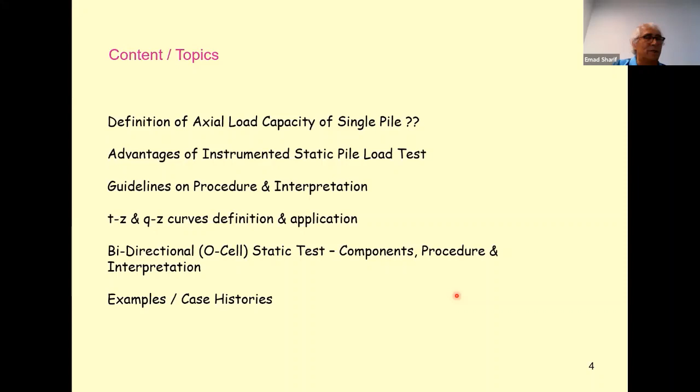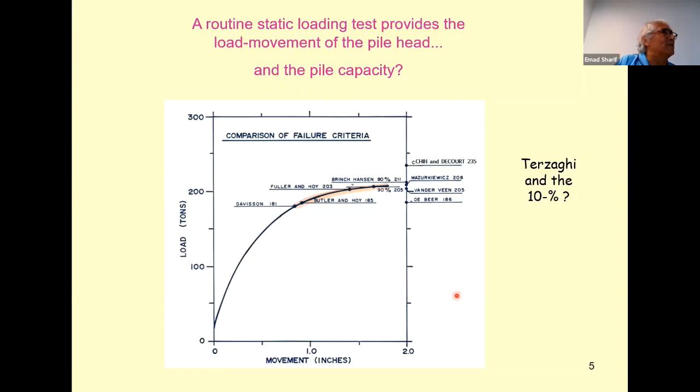As you can see on the screen, there are several methods known in literature, ranging from Davisson's rule to Fuller, Chin-Kondner, Brinch Hansen, DeBeer, etc. Each of these methods has its own analytical procedure, but gives a different definition of the axial capacity using the same data, and this is a problem usually in our literature. Still, the definition used in many specifications is the well-known criteria belonging to Terzaghi, which is about the 10% diameter movement of the pile, which can also be defined on such a curve. So the point is that the definition of capacity of a single pile is not well defined in geotechnical literature.

The decisive value of assessing the suitability of a pile to safely support a structure is the movement that the supported structure can accept without distress, not a capacity chosen as a specific load derived from the shape of or a point on the load movement curve. Yet, the latter is the most common approach to assessing the suitability of a pile for use in supporting a structure.

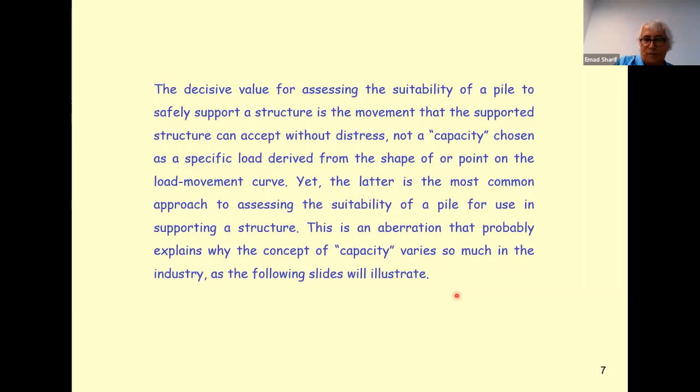And this is the problem that we have. We always have to define a capacity of the pile, but still the capacity definition is not well defined. According to Dr. Fellenius, it is the displacement or settlement of the pile that the structure can tolerate without distress that we should be looking after. However, it is still important to define a capacity of a pile from its loading test behavior.

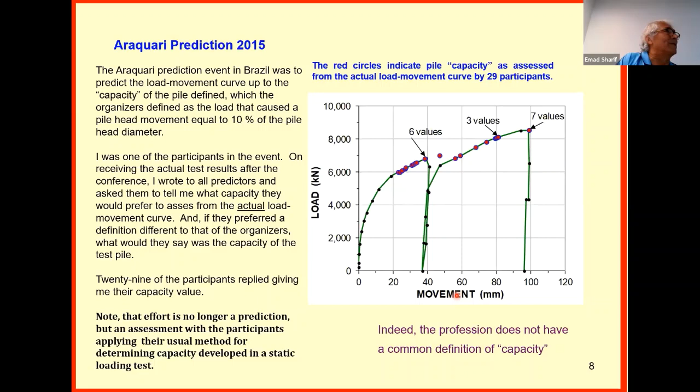Another example is the prediction event in Bolivia, held in May 2017, where assessors from different places over the world, 94 individuals, participated. A pile load test curve was distributed, and the results again show very big variation in the assessment of the capacity of the pile, with a very large statistical deviation. So once we want to define the capacity of a single pile from load test data, we must be careful to give a clear definition of how we are going to do that.

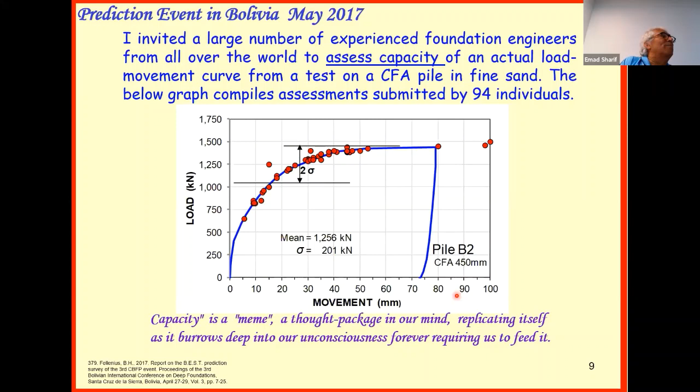And this is why the importance of instrumented load tests comes into the picture. According to Dr. Fellenius, the capacity is a meme, a thought package in our mind, replicating itself as it burrows deep into our unconsciousness, forever requiring us to feed it.

So here, determining the force by means of a strain gauge. The use of instrumentation or strain gauges in the static pile test gives the opportunity to determine the forces distributed in the pile shaft and improves our understanding of pile behavior. Nowadays, vibrating wire type strain gauges are used, and sometimes electrical resistance gauges are still used. This is very well established, and many companies produce accurate vibrating wire gauges which are commercially feasible for accurate and reliable determination of the force imposed in a test pile.

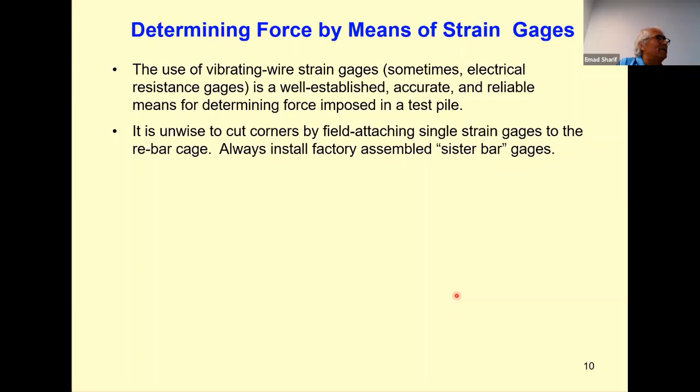However, it is unwise to cut corners by field attaching single strain gauges to the rebar cage. Always install factory assembled sister bar gauges. In the next slide we'll show photographs of what we mean by sister bar gauges and factory assembled systems of strain gauges.

Lately, fiber optical cables known as DFOS have been used to obtain an almost continuous profile of induced strain. As of now, however, the cables are temperature sensitive and the readout unit is expensive. They should always be installed in pairs, two cables, and the data needs to be correlated to measurements from conventional vibrating wire gauges. So the use of optical cables has not been put into commercial practice yet, maybe in some research works, because it can give a continuous record of strains, not only at discrete levels as we usually do. Other instruments besides vibrating wire gauges are retrievable extensometers, used in some projects, but the most common type of strain gauge now is the vibrating wire type.

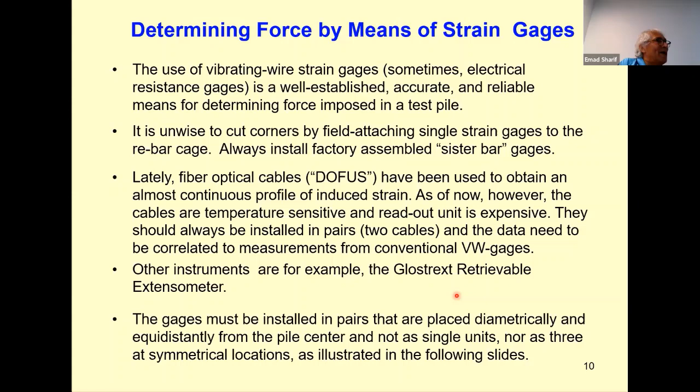The gauges must be installed in pairs, placed diametrically and equidistantly from the pile center, not as single units nor as three at symmetrical locations, as will be illustrated in the next slide. This is a very important guideline about how we plan our instrumentation. First, this photograph shows what we mean by the sister bar, a company or supplier assembled sister bar.

Here we have the strain gauge assembled to a separate extra bar that can be fixed along the rebar on the steel cage and tied to it. It has sufficient length so that it can develop the load, and sometimes it can be welded. It comes with different ranges of diameters suitable for different applications.

In local practices, sometimes we only use the embedded type strain gauge, vibrating wire strain gauge, and we just tie it to the steel bar like this. This method is subject to tilting, displacement, and sometimes damage.

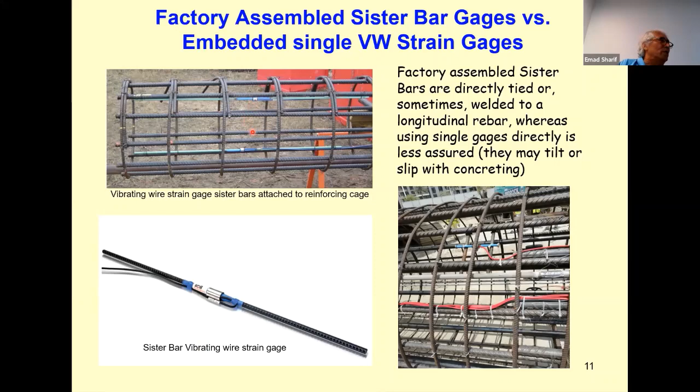So the state-of-the-art instrumentation is to use factory supplied sister bars, because we are looking for accurate simulation of the pile behavior, and there is no means of reducing the expense of the test itself.

Now, in many cases, once the load is applied during the static pile test, there will be a kind of bending effect at different levels. Bending may result from deviation from verticality, change of cross section, and other reasons, and therefore the strain gauges installed at specific levels along the pile shaft must be placed in pairs.

Pairs means that we have strain gauges, for example at level 1, installed as 4 strain gauges along the cross section: A, B, C, and D, where A and C are on one diameter, and B and D are on the other diameter. So we have pairs of strain gauges.

However, in other cases where bending effects exist, we will see that A and C, which are a pair of strain gauges located on the same diameter, each show a different range of strains. Also B and D show a different range.

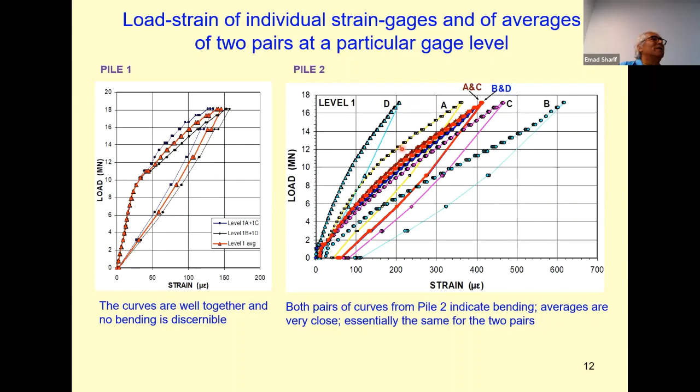In this case, both pairs of curves from pile 2 indicate bending. Averages are very close, essentially the same for the two pairs. However, both sets of records for pile 1 and pile 2 are good and fully useful.

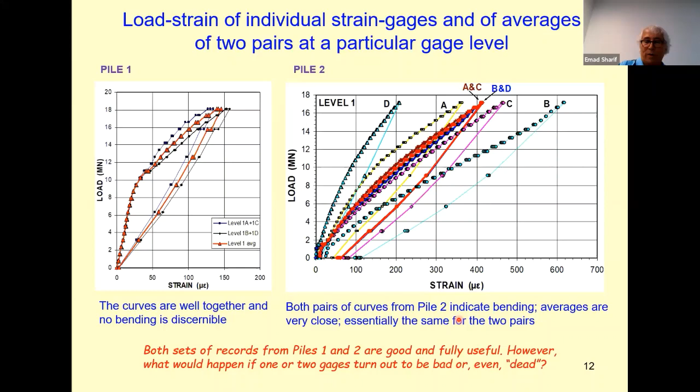However, what would happen if one or two gauges turn out to be bad or even dead? This is explained here. If we want to combine three of the gauges, so I have A plus C plus D, or A plus C plus B, or two strain gauges that are not pairs.

So instead of A and C, I take A and D, which are on different diameters, or B and C. All these selections will be poor. All these selections will give me data that does not represent the actual behavior because of the effect of bending.

So in this case, if any of the strain gauges gave bad data or was dead, we have to cancel the other pair. So I can combine A and C, and give the average of A and C, or B and D, or the four together, but I cannot combine any three of them because it will shift the measurements to a wrong position, as we see from the curve. There will be a big error based on the amount of bending.

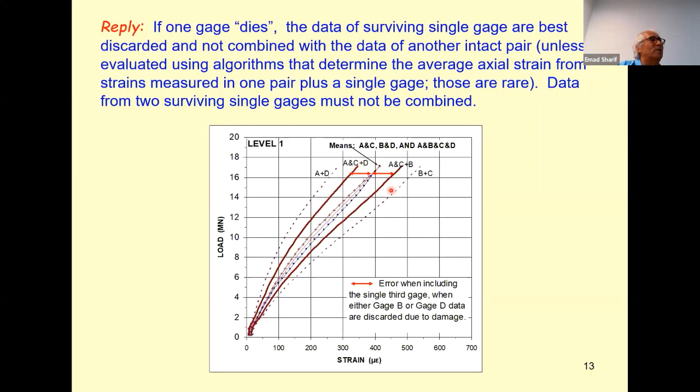But as a guideline, in our testing we must ask the reporting company, or the company doing the test, to present such data about the strain and load information, so we can see the response of each strain gauge and how the averages have been taken, because the averages are then used to calculate the load at every level, as we can see now.

So now we measure the strain. With the guidelines given, we know that we are getting reliable measurements of the strain at different levels, but we are not interested in the strain. We are interested to know the stress, or to measure the load.

So how do we get from strain to force? We need to know the force. If we look at the relationship between strain and stress, we multiply the strain by the modulus to get the stress, and multiply by the cross-sectional area to get the force. Therefore, the term EA, which is the axial stiffness of the pile, is a key parameter.

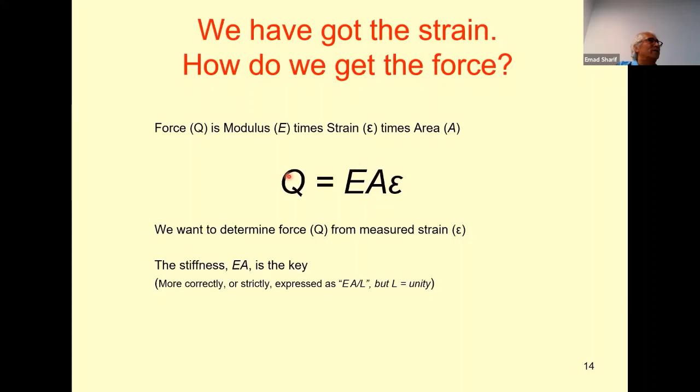Here we must focus on how we can get an accurate estimate or assessment of EA in order to get the force at different levels. So here's the situation: if we are dealing with concrete piles, then we are talking about combined material. We have concrete, we have steel, and sometimes we have casing.

If we are talking about steel piles only, then the modulus is ES, and it is almost linear. It is less dependent on the strain, and the cross-sectional area is well defined, so there is no great deviation. But when we are talking about bored piles, about concrete piles, then we are talking about steel and concrete, and generally equations like this can give us the combined modulus of the cross section.

However, we know that ES, the steel modulus, is very accurately defined, and the area of steel is also very accurately defined, whereas the area of concrete and the modulus of concrete are less accurately given. So ECAC, this term, is less accurate, and in this case we have to see what we can do about it.

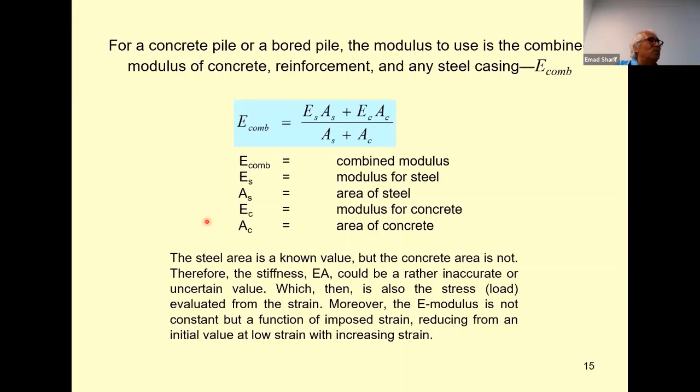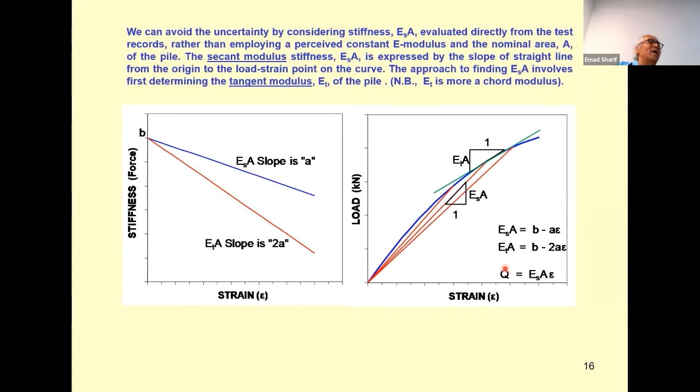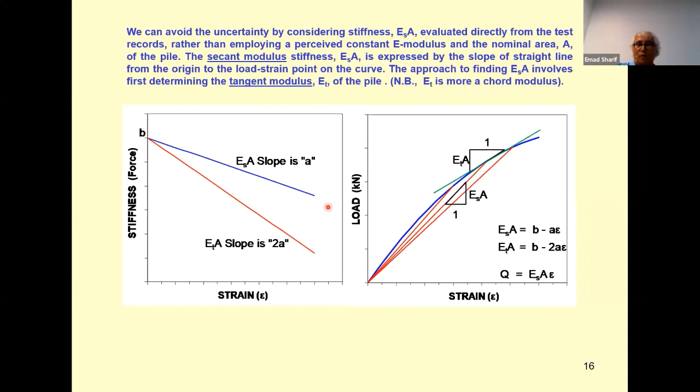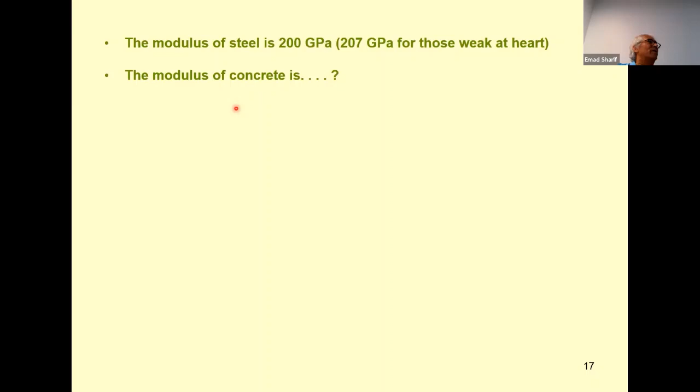The main thing is that we want to define this formula from the results of the static load test. Of course, as we say, the modulus of steel material is very accurately known - it's like 200 GPa, or 207, whatever. But the modulus of concrete is sometimes difficult to define.

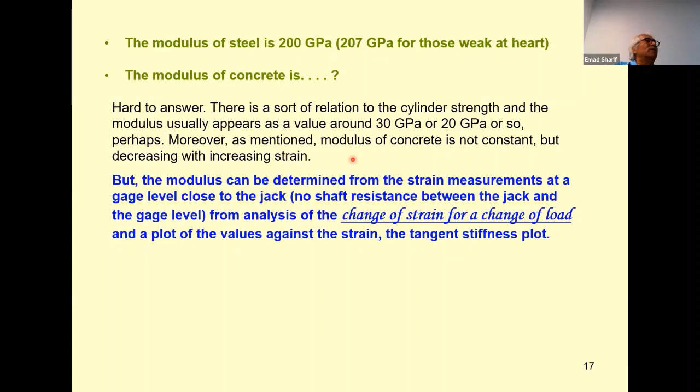Of course there are known ranges of the modulus of concrete - you see sometimes 30 GPa, 20, 35, etc. And there are relations relating the modulus to the concrete strength, given by the ACI code or other codes. However, this accurate definition does not show the dependency on strain actually - it just gives a fixed value. And we know that the concrete strength tested in a concrete cube outside the pile, or before completing the pile, may be very different from the concrete strength and properties when the pile is constructed.

So it's always important to use the results of the strain gauges and instrumentation to determine the axial stiffness for more accurate assessments.

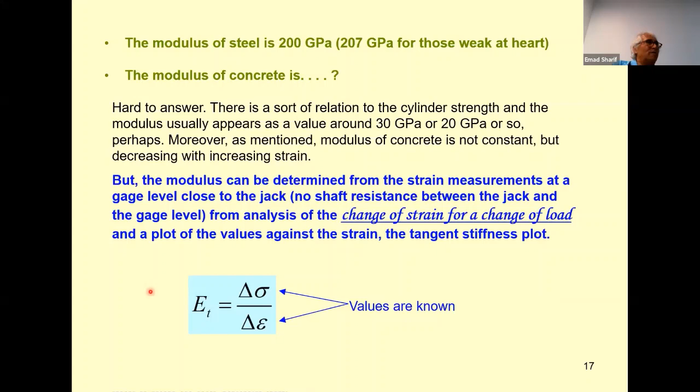So here, if we determine, we know as we saw from the previous slide, that the tangential modulus is just delta sigma over delta epsilon. This is the definition of this modulus, and accordingly ET is delta sigma over delta epsilon, and we know that this is the formula of the straight line of the stiffness, slope A, epsilon plus B.

If we integrate this over epsilon, then we get sigma is equal to half A epsilon squared plus B epsilon, and we know that sigma is equal to secant modulus times epsilon, so we just substitute, and then in this case we get that ES, which is the secant modulus, is equal to half A epsilon plus B. This proves that the slope of the line for the secant modulus is just half, or 50%, of the slope of the tangential modulus.

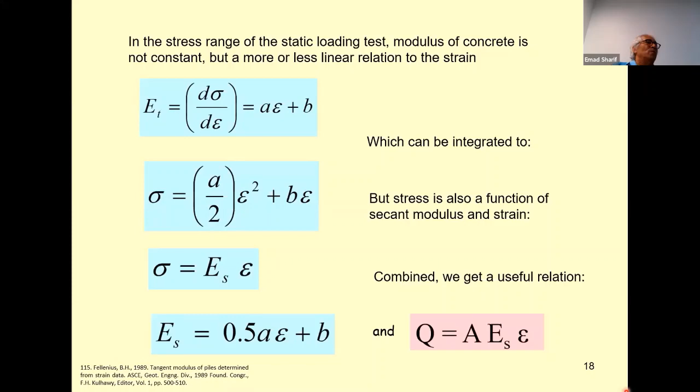And then once we know this, we can calculate Q also. This is results of a pile test, instrumented pile test. This is a head-down test, so this is a conventional test. It's 1.83 meter in diameter.

It's a steel pile. And for steel, we know that the modulus is less dependent on strain, and it is very well defined, almost constant. Here we plotted the gauges, the strain gauges, which are taken very close to the applied load. So the gauges are at 1.8 meter below the pile head, so they are not affected by the shaft resistance. This is the plot of the secant stiffness, EA, secant stiffness, which is equal to applied load Q divided by epsilon, versus epsilon. Here we see that the data is very well defining almost a constant modulus, and this EA from the secant is 46.8 giganewton.

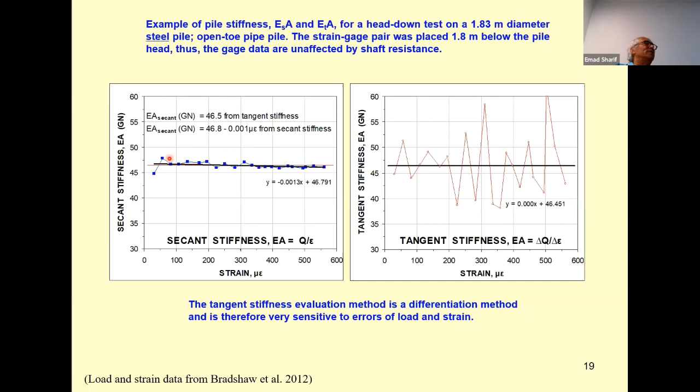Whereas if we plotted the tangential modulus, the tangential stiffness or incremental stiffness, because it depends on different tangential points or incremental points, we can see lots of variations, and this depends on the accuracy of gathering the loads. However, it gave almost similar prediction and very low, almost zero slope, and the two predictions are almost the same here, because this is a steel pile.

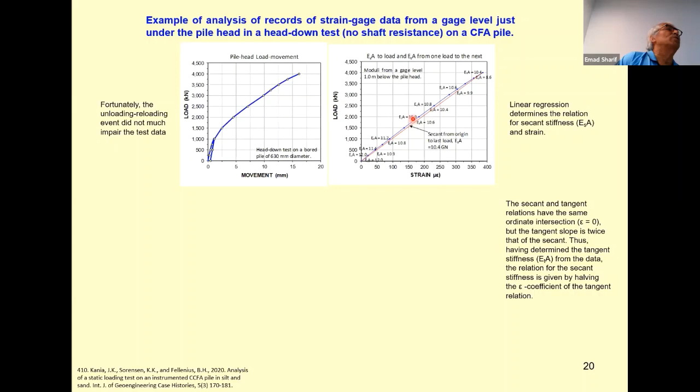For concrete pile, here is an example of a CFA pile, where this is the pile load test, pile head movement versus load relationship. We know here there is some initial loading and unloading relation, and this blue curve shows the first loading, the first loading secant - this is the load versus strain, and this is the evaluated secant stiffness. As we can see, because the relationship is non-linear, it is reducing: 11.2, 10.9, 10.8, etc. And at the final level, it is 10.4.

If we plot again the secant stiffness versus strain and the tangential stiffness versus strain, we can get these relations. And with these relations, we can see here in this case the tangential stiffness - we have very small deviations, which means that the data is very accurately collected by the strain gauges, and we can see that the slope of this curve is just twice the slope of this curve, and this is the relationship that we are looking at. So here, ESA in giganewton is equal to 11.5 minus 0.003 microstrain, and this relation can be used to evaluate the loads along the pile shaft.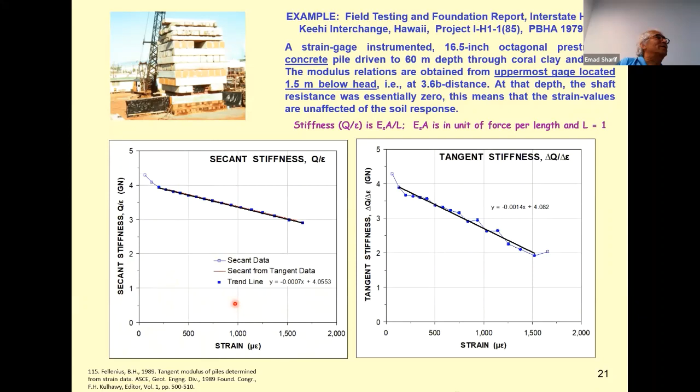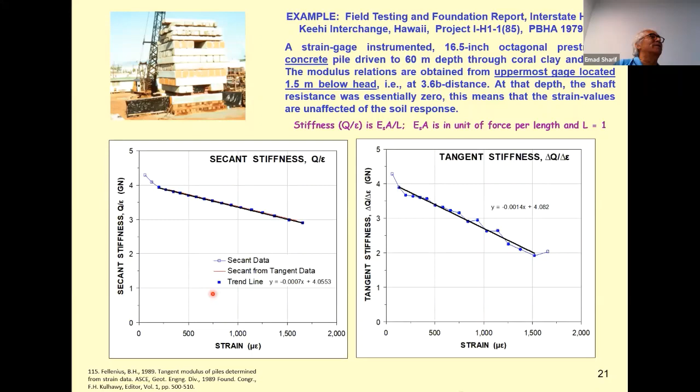This is another example of also a concrete pile, which is also the same here.

This is important to mention: if we want to measure the secant stiffness, we must start from true zero. But if we want to measure the tangential stiffness, because it is incremental stiffness, delta Q over delta epsilon, then in this case we don't need to start from a real zero strain.

But for secant stiffness, we need to start from a zero strain. Sometimes the strain gauges are loaded initially before the test, and in this case, when we plot the secant stiffness, we see that it is nonlinear. So we have to make some kind of correction to reshift the strains to a zero value.

In this example, the secant line, the red one, is the secant line from the tangent method. We apply it here and see how much correction has to be made. After adding 8 microstrain to each of the strain values, we get the secant stiffness line to match with the tangential one.

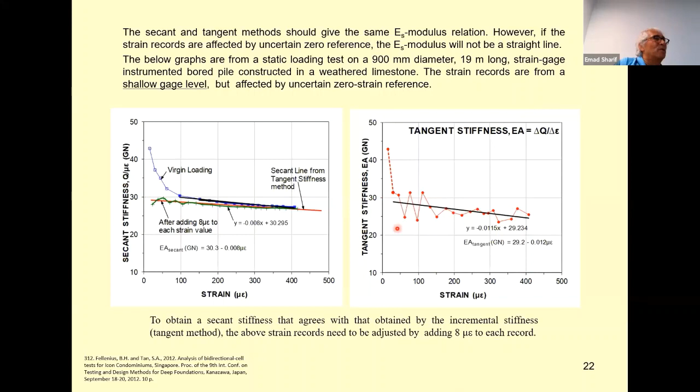So if we want to use the secant stiffness curve, we must make sure that our strains start from a real zero. If it is shifted from zero, the results will be nonlinear and have to be corrected. Usually in practical applications, we depend on the tangential stiffness because it does not depend on where the strain value starts.

Here are some important guidelines to ensure that optimal accuracy and reliability of strain gauge records is obtained.

As Dr. Fellenius says, in the past, loading tests included series of unloading and reloading the test pile in order, it was thought, to get an appreciation of the distribution of force in the pile. The advent of instrumentation gave a direct means for this. However, many kept the unloading, reloading steps in the test schedule. This is unfortunate because the shear response along the pile is different in virgin loading versus unloading and reloading fashion. The effect is that the measured strains do not represent the true force at the gauge location.

As insight and means develop, we have a tendency to hang on to past details. They are as useless as a tailbone. Unfortunately, while a tailbone does not harm, an unloading, reloading event will adversely affect the ability to accurately back-analyze the strain gauge records. We'll see some examples of this.

Additional undesirable scheduling aspects are to use load increments of uneven magnitude and load holding durations of different length. For optimum value of the test data, increments should be equal in magnitude and load holding should have equal duration.

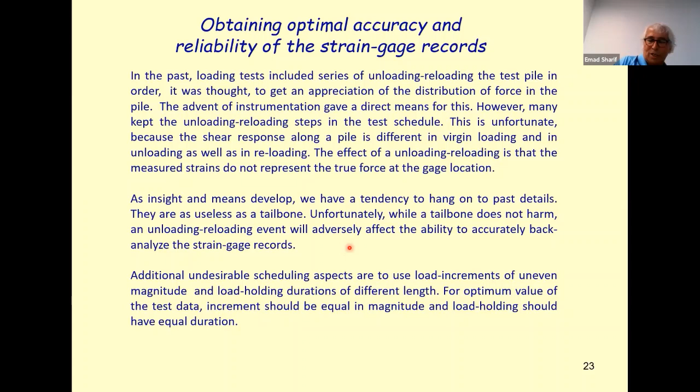So here we have a few important guidelines given to ensure that we have data that can be interpreted properly, without being affected by unprepared or unrequired procedural steps like unloading and reloading.

This is an example of a 600 millimeter diameter and 54 meter long strain gauge instrumented cylinder pile. Here is the loading cycle. It has the first loop L1 and then the second loop L2, each one having unloading and reloading. This is the load versus strain relationship.

We can see that the virgin loading, loop 1L, the blue one, is nonlinear. Then we have the reloading, 2L, which is a different one. So it gives a different and confusing result for getting the axial stiffness.

If we plot the secant stiffness of the pile, we can see that the first loop, the blue one, gave a very suitable relationship, whereas the reloading cycle, because it did not start from zero, gave a nonlinear curve which is very confusing and has to be corrected by adjusting the strains — in this case by subtracting 59 microstrain because it did not start from zero. So we have to deduct some microstrains so the green curve becomes this dotted curve. This is because we have an unloading reloading cycle.

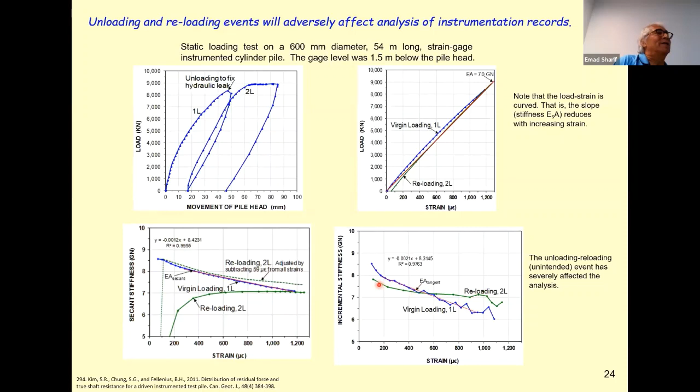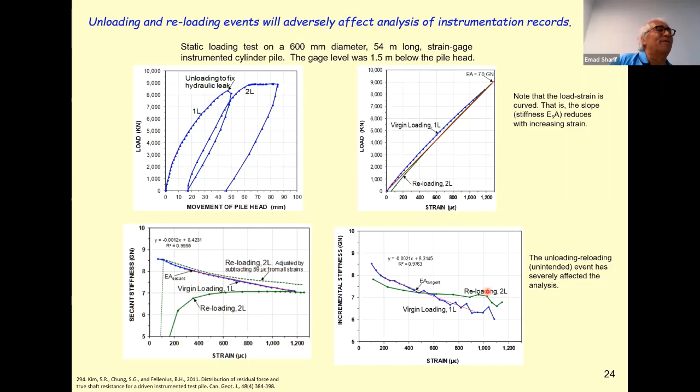If we also plot the incremental, or tangent, stiffness, we get the same thing: we have the first loop and the second loop, and it's only giving us confusing results. The second loop is of course stiffer and less dependent on strains, because it's a reloading condition. So the unloading reloading event has severely affected the analysis.

In this example, we can see that accidentally this pile load test experienced a leak of the hydraulic oil in the jack, and suddenly the load was dropped. Then the jack was repaired and the load was reapplied again, and we reached the maximum point, and then we unloaded.

Even this small partial reloading has a severe effect. Here is the load versus strain. This is the first loop. Then we have reloading again, and then we have a break in the relationship.

If we plot the incremental stiffness, we can see this is the first loop, which gave a nice linear relationship here. But then we have reloading, and once we reach the curve again, we reach the same line again. So it needs a lot of interpretation and evaluation.

In general, there is no need for this unloading and reloading. This happened by accident, but in general, in our practice here in the Middle East, in Dubai, unloading and reloading are still specified in many specifications and many projects.

According to Dr. Fellenius' experience and his recommendations for instrumented pile load tests, it is not necessary at all to include any unloading, reloading cycles.

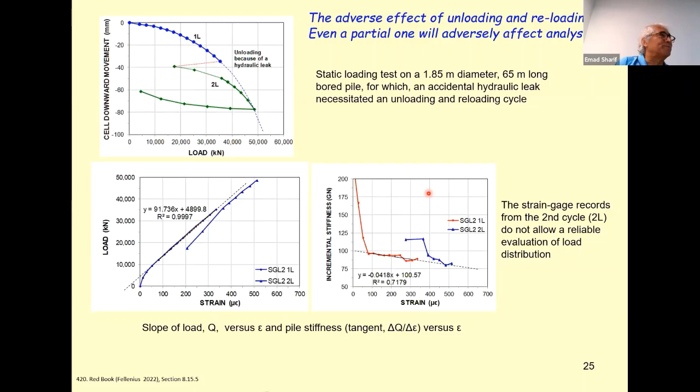Therefore, to ensure good records and the optimum return on our money invested in testing an instrumented pile, we require reliable zero reference, accurate measurements, and absence of disturbances. These disturbances mean unloading, reloading, varying magnitude of load increments, and non-equal load holding durations.

Sometimes in some testing, once the load reaches some value, the specifications require holding the load for 4 hours, 6 hours, or 12 hours, then continuing for different durations. This will distort the data gathered by the strain gauges, and it will be very difficult to interpret them and use them for simulation of the pile behavior.

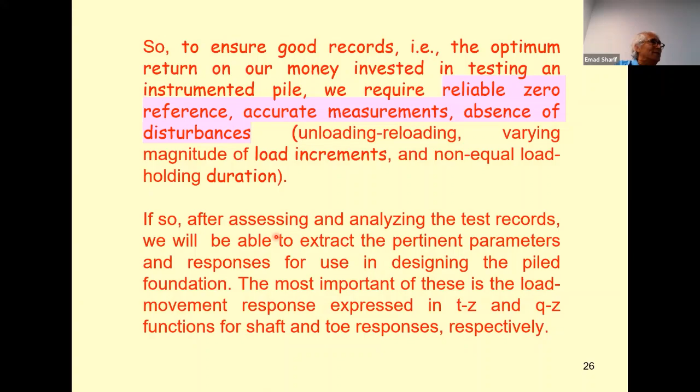So once we ensure that we have accurate, reliable measurements absent from disturbances, then we can go forward for further interpretation by analyzing the friction and end-bearing development functions, known as TZ and QZ functions, from the load test data, and do a complete simulation analysis of our pile.

So this is just a fictitious, very simple example: a 25-meter long pile, 650 millimeter in diameter, having homogeneous soil with 2,000 kilogram per meter cube density. Pore water pressure is hydrostatic with a water table at 1 meter depth, and the side friction is increasing.

Depending on a constant beta value of 0.3 versus the effective pressure, this is the theoretical side friction value. It is mobilized at 5 millimeter displacement, so once the pile has 5 millimeter displacement along the shaft, the maximum skin friction mobilizes 100%. This is a typical TZ curve describing the rate of mobilization of side friction for this example.

Now, after reaching the maximum side friction, we have three potential behaviors: either to go into a plastic behavior, like the blue curve, or a softening behavior, the green curve, or a hardening behavior, the red curve. All of these curves can be simulated by selecting some functions to represent the behavior.

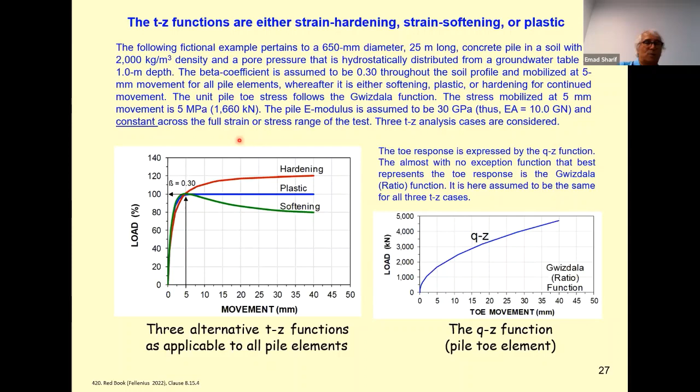Assuming these are the functions representing this pile and this soil condition, then we can do the simulation analysis with proper software. In this case, Unipile software is used, but there are other commercial softwares available.

The simulation will give me the side friction development based on the TZ curve we have selected, either plastic, softening, or hardening, the toe mobilization versus toe movement, and then the total pile head movement-load relationship for the three behaviors: softening, plastic, and hardening.

This is the point here, where this corresponds to the target load, where we have beta equal 0.3. So our maximum friction is defined based on that, and our end bearing is 5 megapascal. So this is the point on the curve, and we know that after this point we have different behaviors based on the behavior of the side friction, either plastic, softening, or hardening.

And this is the point on the toe which corresponds to 5 millimeter displacement, where the target toe resistance is mobilized. So all this information we can get from the simulation analysis once we define the TZ and QZ curves. Not only that, we can also get the load distribution along the shaft at different loading stages.

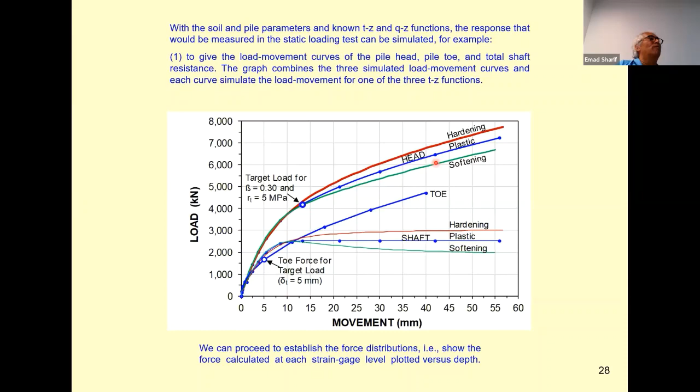If we take the load at 6,000 kilonewton here, let me see the previous slide, at 6,000 kilonewton, and we take a horizontal line, we can see that the total load is different for the three cases of side friction mobilization, or the TZ types. We can enlarge this on this screen here. So the load is 6,000 applied at the pile head.

The middle one is showing the plastic behavior, and this is showing the hardening behavior, this is showing softening behavior. For this example, with this weak soil, the difference is not substantial, but in practice, in actual cases, the differences can be very large.

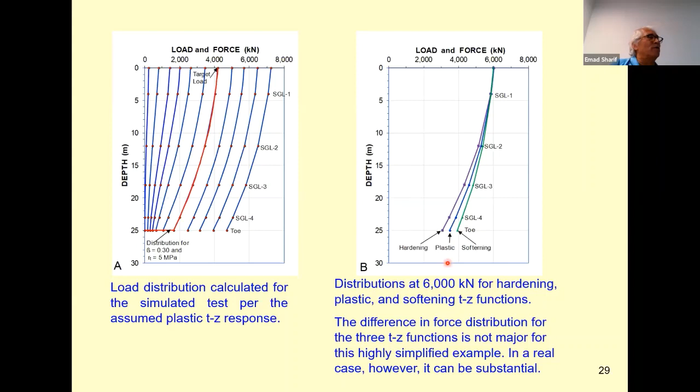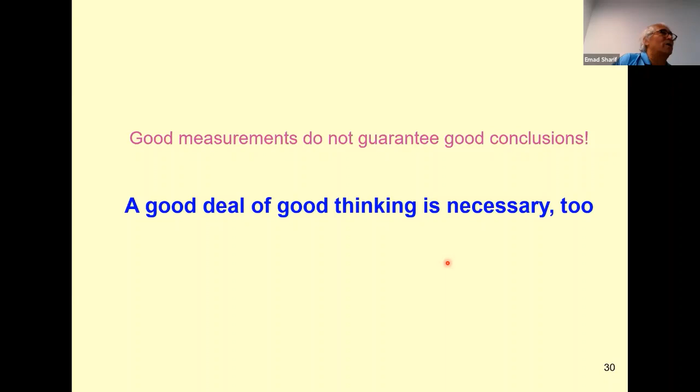So it is important from our load test results to get representative functions for the TZ and QZ relations. It's not only good measurements that guarantee a good conclusion, but good thinking is also necessary to ensure that we are getting good conclusions. And this is an example of that.

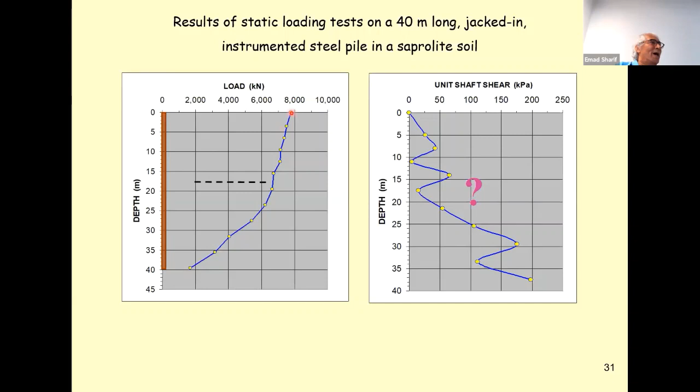Here we have results of a static load test on a 40-meter long jacked-in instrumented steel pile. This is the relation of unit side friction, showing the side friction that is mobilized versus depth. And this is the load distribution at this loading stage, at this side friction. This is the end bearing mobilized load, and this is what we can do about this.

We can do simulation. If we generate our TZ functions and QZ functions and do computer simulation to simulate the result, then we can get something like these red curves, which are very accurate, very closely simulating the actual behavior, and we can adjust our beta values if we are using the beta method for side friction.

And from that, we can draw our side friction mobilization in a nice way, so that we now have a model. This is a simulated model, and this simulated model is accurately matching the actual result of a load test, but at the same time, it is rational, and it's not dependent on, you know, a layer-by-layer simulation.

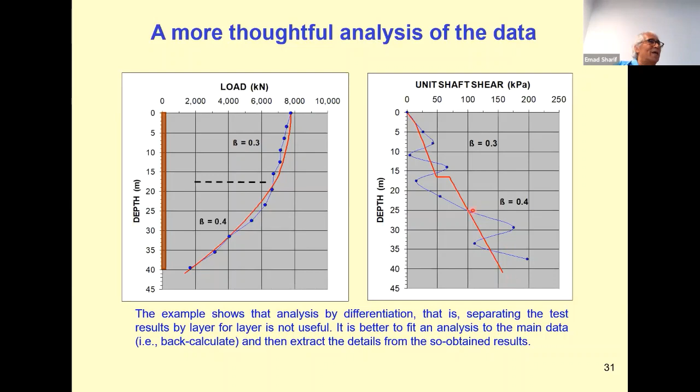It is based more or less on behavioral simulation, which can now be used for adjusting the design of our pile.

Bidirectional load test was first recognized, I think, in Brazil in the 1970s. Then in the 80s, Dr. Osterberg in the United States recognized the need for using jacks embedded into the body of the pile, and he developed his Osterberg cells, and then he established the load test company, I think, in the 1990s, and since then the development of using the O-cell or Osterberg cell method has been very much in practice.

More than 30 years of experience. The company Load Test, which is now Fugro Load Test, has contributed a lot and has developed the procedure for using instrumented piles along with the O-cell system, and it is nowadays known as the bidirectional load test.

So this is an old photograph showing the Brazilian company. It's called Arcos, which invented their system for using the O-cell or bidirectional system in the old days. The pile in this case is divided into two parts, the upper part and lower part, and the hydraulic jacks are embedded within the body of the pile at a certain selected level, sometimes at the toe, sometimes within the body of the pile, and the jacks are activated from the surface after grouting the pile.

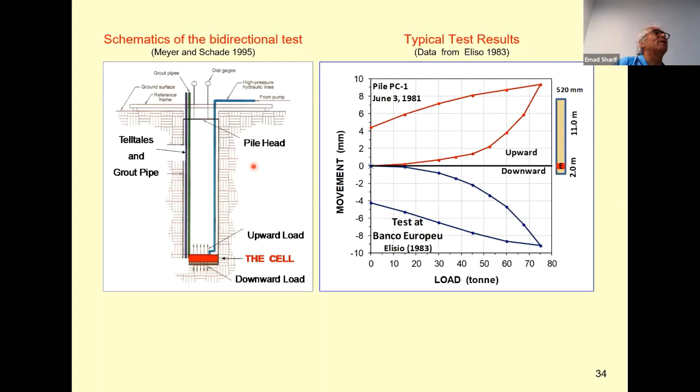When instrumenting a pile with vibrating wire gauges, it is desirable to record strain, and this is very important: record the strain and temperature, because the strain gauges already measure temperature. Typically in practice we only start recording strains before applying the load, but it is desirable to record strain and temperature from before the cage is inserted in the pile, before and after concrete is placed, during hydration, frequently during the first 24 hours, then spaced out several times a day before starting the test.

It is particularly important to record the loads and strains during the weld breaking event. The weld breaking event is what we see in the previous slide.

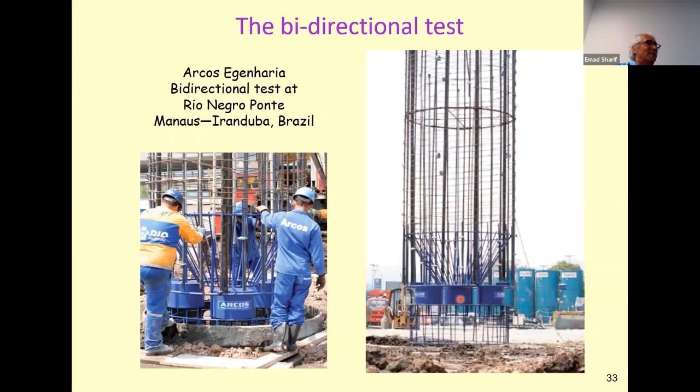When we install the lower cage, we keep some bars connecting the upper and lower part, and these are typically welded. So once we put the lower cage down, before concreting, we cut these bars. This is called the weld breaking point.

So here we have to measure or record the load or strain and temperature in the vibrating wire gauges at different events, not only at the start of the test.

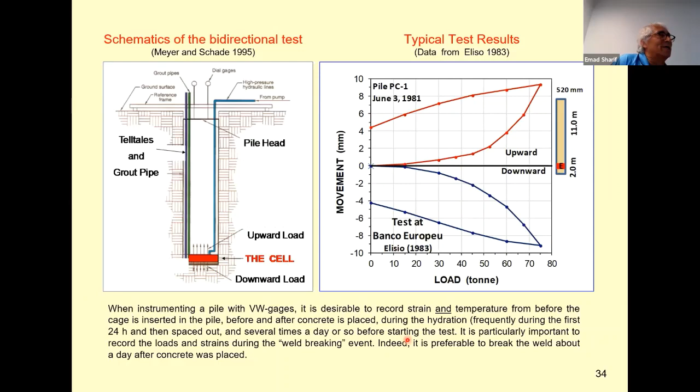Nowadays we have data loggers, so there is no problem fixing the data logger and connecting it to the strain gauges once they are connected to the steel cage, and keeping these records for a few days, so we can get the load history and temperature history before the test is done. This data is important to know if there will be any preload existing in the pile before the test starts.

Bidirectional cells have also been used in driven piles. In this case, this is a hollow cylindrical concrete driven pile. After driving, the O-cell system is installed and grouted into place.

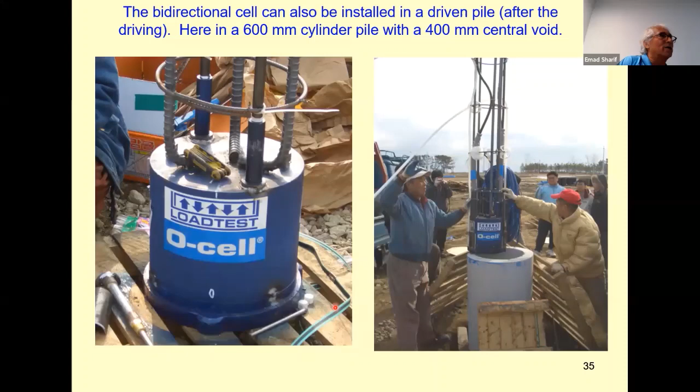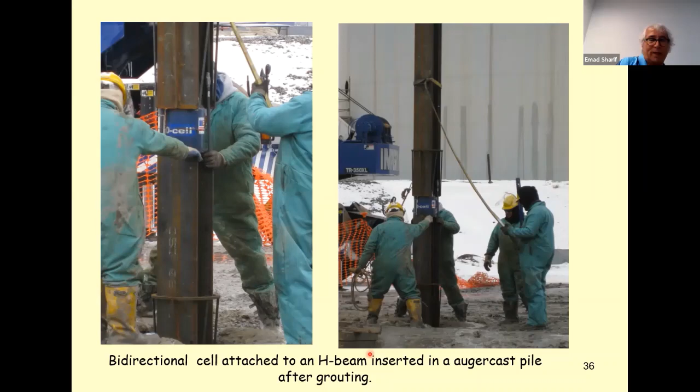This is an H-beam installed in a pre-drilled hole and grouted. The O-cell is installed and lowered down, and then the pile is grouted. So different applications of the O-cell are possible, not just one.

This is another photograph of a Fugro load test on a large diameter pile. This is a typical steel funnel made to allow for concreting with a tremie pipe down, serving as a guide for the tremie pipe to go through the plate systems in order to make good concreting for the lower part of the pile.

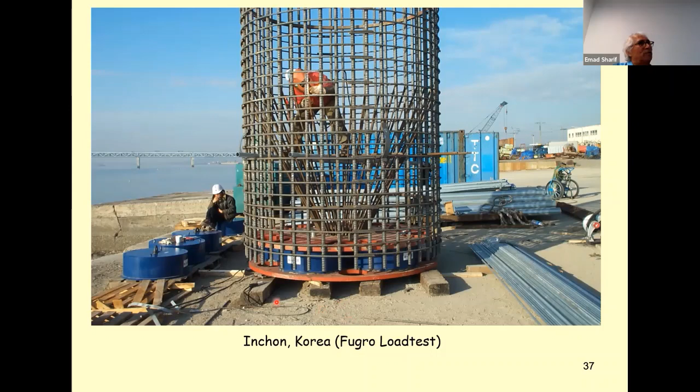When the pile is instrumented, the results look something like this. We have the upper shaft and the lower part, or the toe. If the cell is at the toe of the pile, we get a curve like that representing the toe. If it is somewhere above the toe, we get another curve representing the lower part of the pile.

In this case, the shaft load has been corrected for the effect of the weight of the pile, so it is slightly shifted to the left. And this shows the displacement. At the end here, we have reached 100 millimeter displacement, and there was unloading. Whereas for the toe, there was some lag before the toe resistance started to take place, and then it followed a linear relationship.

Then, from the strain data, we can calculate the axial stiffness, ESA, and from that we calculate the load at different levels. This gives us the distribution of the load as we see at different stages, and this will be the blue curve showing us the actual.

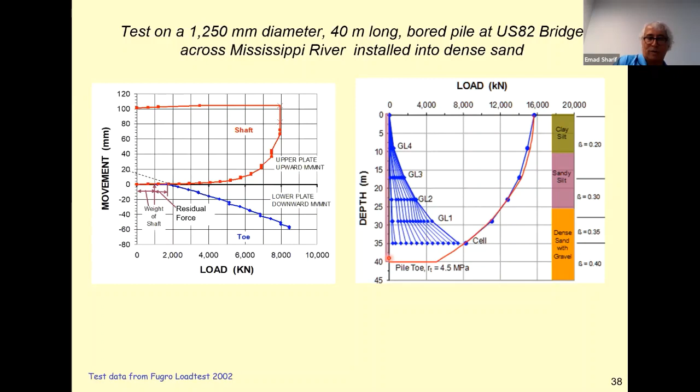Head down relationship, load distribution at the final load, which is around 16,000, if the pile is loaded in a head down fashion. But what is the red curve? The red curve is a simulated curve, a flipped result. So here is the bidirectional load distribution as measured and as flipped over to show the equivalent head down distribution.

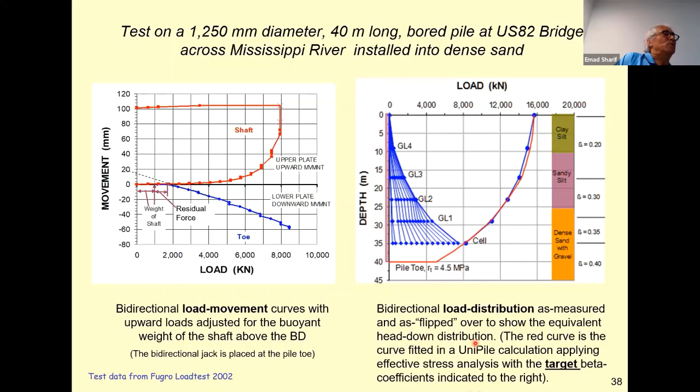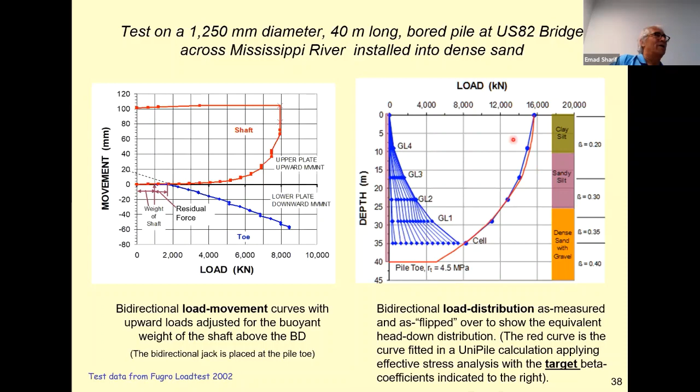The red curve is the curve fitted in a UniPile calculation applying effective stress analysis with the target beta coefficients indicated on the right. So from the strain gauge data, we can establish our TZ and QZ curves, which simulate the actual behavior measured from the test, and we can adjust our beta parameters for the different layers so we can make a very accurate simulation represented in this case by the red curve. This is what we call the flipped results, but the blue curve shows the actual results, which indicate that we are very accurately simulating this result.

Now, in practice, how do we get the result and how do we get the equivalent head down load movement curve? The typical data we get from a bidirectional load test is shown here.

We have the movement of the upward part of the pile, and this is the movement versus load of the lower part of the pile. Then we get the equivalent top down, the equivalent head down pile, as if the pile is loaded from the top. We need to sum up these results to get our relationship. How do we do that? Typically this is given by the testing companies, but it's very important that the engineer, the consultant, must be aware of how this is happening.

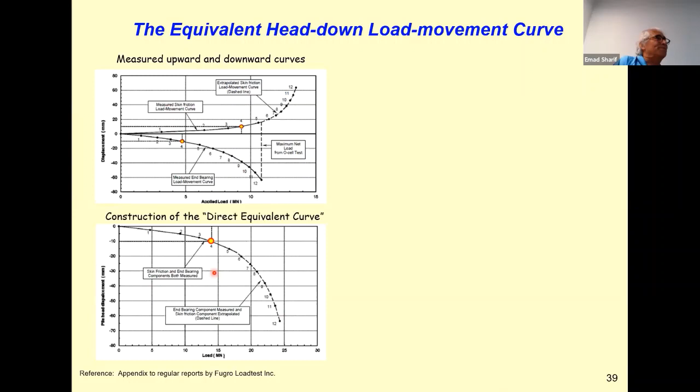Not only that, if this is our curve that we have just extrapolated, we have summed the upper and lower curves and extrapolated down. We know that the head-down pile, or the pile loaded from the top, will show more shortening, more elastic shortening, than the pile loaded in the bidirectional method, particularly for the upper portion of the bidirectional test.

This is because the soil near the O-cell is much stiffer than the soil near the head of the pile. So if the pile is loaded in a top-down method, it will show higher elastic shortening than what has been indicated by the measured displacements of the upper portion of the bidirectional test. And this needs some further correction.

This correction is usually given, or the method or approximate method for doing this correction based on some assumed friction distribution, is given in the appendix of the test reports, which you can look at. It is generally accurate—if checked against methods like finite element simulation and so on, it shows that it is practically suitable to do that.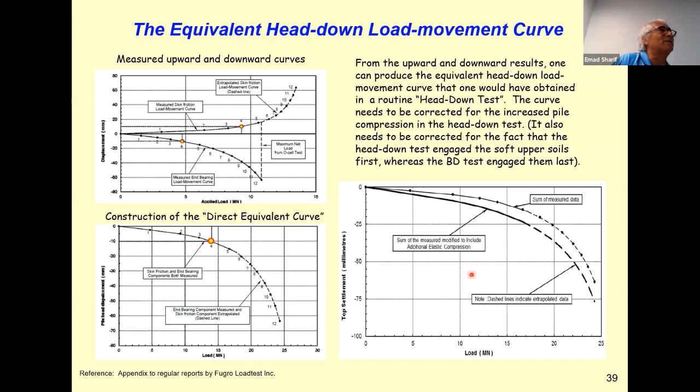Now a better method of doing the extrapolation and simulation, if we have an instrumented pile test, is to focus on our TZ and QZ curves. As I just mentioned, we can calculate from our instrumentation data the unit shaft resistance versus movement, and we can plot our TZ curves for different levels—level 1, level 2, level 3—depending on the test results.

Sometimes we did not reach the maximum side friction, like in this curve and in the red curve, which represents the toe value here. Then we have to do some extrapolation. This extrapolation can be taken as conservative because it represents only few parts, particularly the parts away from the jacks. And in this case, we can do such extrapolation.

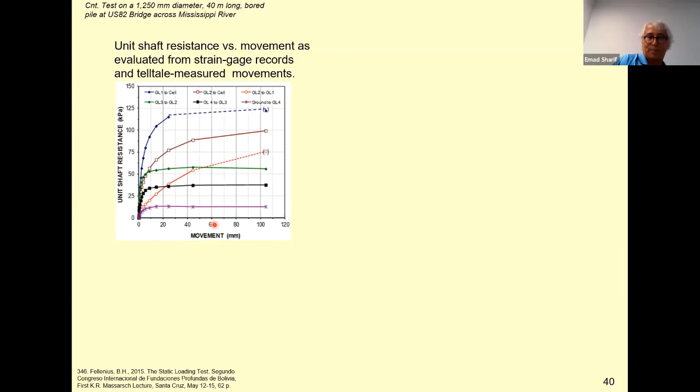Once we do this extrapolation, we can fit theoretical functions to represent this plastic behavior of our functions for different levels, and for the side friction as well as for the end bearing.

And then we can use that to simulate the O-cell first of all, and then to simulate the head-down behavior. So the O-cell here, you can see the simulation, how accurate, using Unipile, after selecting proper TZ functions for the different intervals. And you can see that for the end bearing as well as for the side friction, the blue points represent the measured values, whereas the red line represents the simulated curve.

And from this analysis, we can get the head-down curve. So this represents the toe, this represents the shaft, this represents the head-down. And for our simulation, we can extend our analysis to any level of displacement we want, based on the functions that we selected.

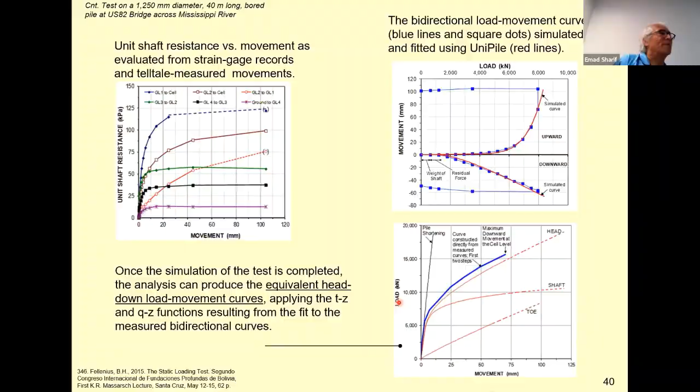Whereas the blue curve shows, of course, the uncorrected O-cell equivalent head-down test. This is just an enlargement of the same slide, but here what we want to show is the upper part of the pile, the behavior of the upper part of the pile. And if we just plot it in this scale, we have the displacement on the horizontal axis and the load on the vertical axis.

But after applying the correction, as I mentioned, for the elastic shortening to represent the head-down loading sequence, then the test curve will become this red curve. So this red curve represents the as-in head-down test. It's important, because it makes a big difference if we don't do this correction—it's important because in defining the capacity or understanding the behavior, it makes a big effect.

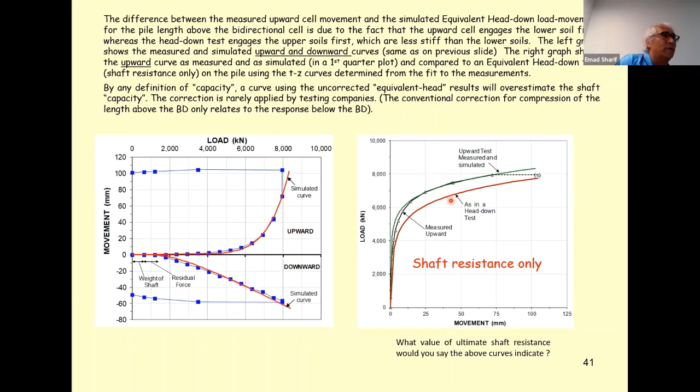Residual force denotes any force existing in the pile shaft before the load test starts, and it can come mainly for driven piles from negative skin friction if there is ground subsidence around the pile before the test happens. Fortunately, for bored piles installed in stable grounds, the residual forces are very small.

Typically they are ignored. If you want to know more about residual force and some examples of how it is evaluated and assessed, it is advised that you go to the red book of Dr. Fellenius. He has a very clear chapter talking about that. But talking about bidirectional test, bidirectional load is not sensitive to the existence of

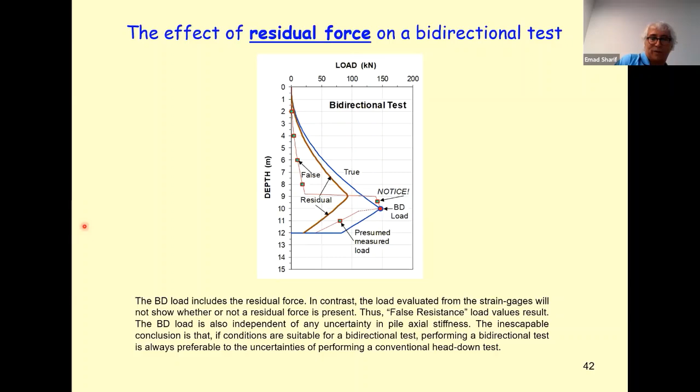residual forces in the shaft. Okay, and typically it is ignored and it's not significant, particularly for bored piles.

Now, the last part of the presentation is to show some case studies, and we will show the first study for a project in Dubai. The project included two preliminary test piles, 1200 and 1500 diameters, one 39 meters long and one 44 meters long, in Dubai Creek Harbour.

The loading sequence is 20 equal increments of the maximum test load. Then there was a holding period for 6 hours, then unloading, and the results are shown: the movement of the upper plate, movement of the toe, movement of the top of the pile, and movement of the top plate.

The comment from Dr. Fellenius here is that the holding period following the test is not important, so we can stop the test here. It's just confusing.

The second thing is that because the displacements reached during the test, particularly at the toe level, are very limited, it is recommended to increase the load. Once we reach the final of our planned 20 increments, if we still haven't reached failure of the upper or lower parts and displacements are limited, we can go for more increments until we reach either failure or the maximum capacity of our jacks, and then we can stop.

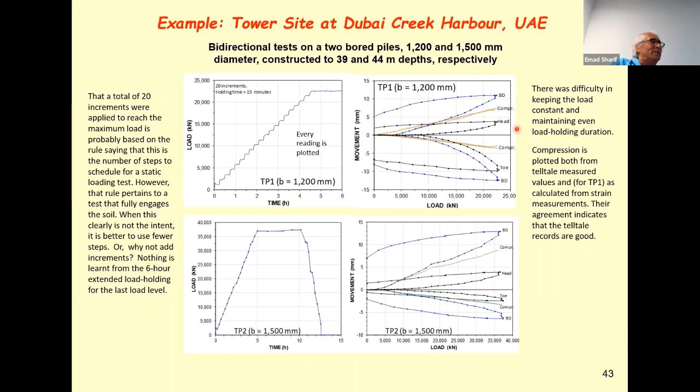This is the data as presented, from the data that we have - this is the 1200 millimeter pile, this is the 1500 millimeter pile. This is the strain gauge level closer to the jacks for this one as well. This is for the upper and lower parts, and as we can see, it's a good matching and it's almost getting a linear relationship, so it's good accurate data.

Now, if we take this data close to the jack and plot the tangent stiffness, we see that we have high fluctuations, which indicate that the data quality can be improved. Maybe we have to look at the results of every strain gauge to see if any of them has to be cancelled, so we can reduce this fluctuation.

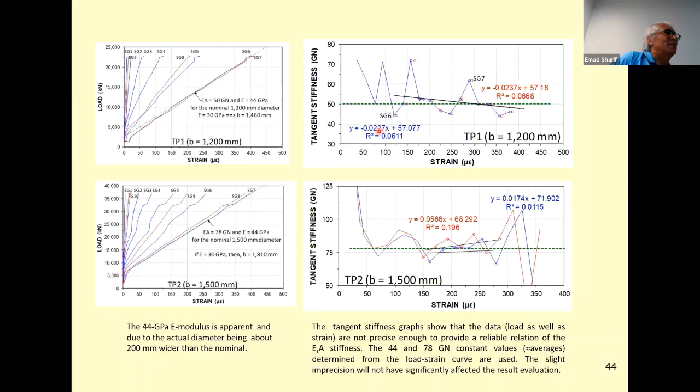But in general, we can get the relationship for our linear stiffness, for our axial stiffness, and we can get the secant stiffness based on that. Actually, for this case, we get high secant stiffness, which can be improved in our next practices.

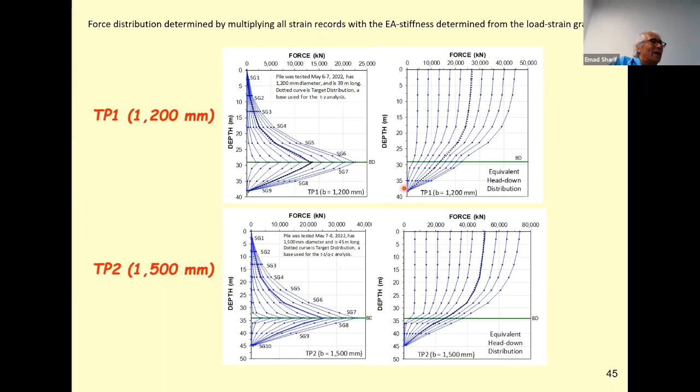What we notice here is that nothing has been mobilized at the end bearing, as we expect typically here in Dubai. Because it's a long pile and very small load has been transferred to the end bearing, this is mostly because of the very limited displacement at the top of the pile achieved, and accordingly our designs will be mostly based on ignoring the end bearing, which adds to the conservatism we have.

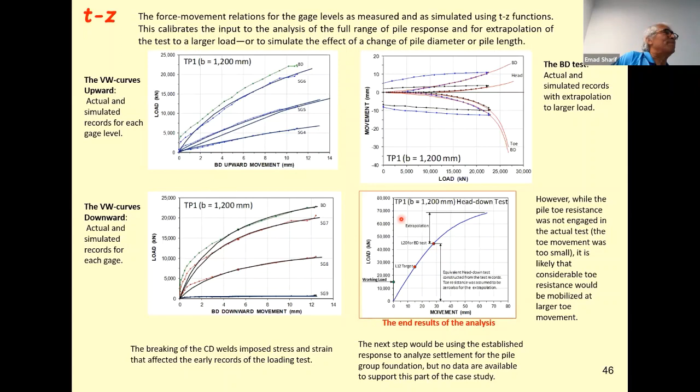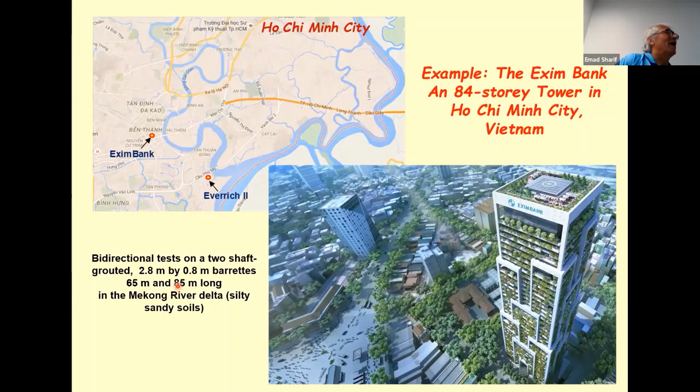Two tests have been conducted. One test is a 65 meter long barrette, and the other one is 85 meter long barrette. So the O-cell test can be conducted on barrette piles, not only in circular sections.

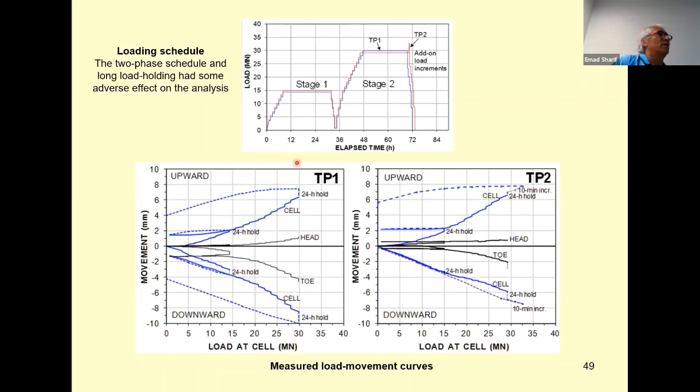In this case, the sequence of loading has included an unloading and reloading, so we have two loops. And these are the actual results that have been obtained for the first test and for the second, longer test.

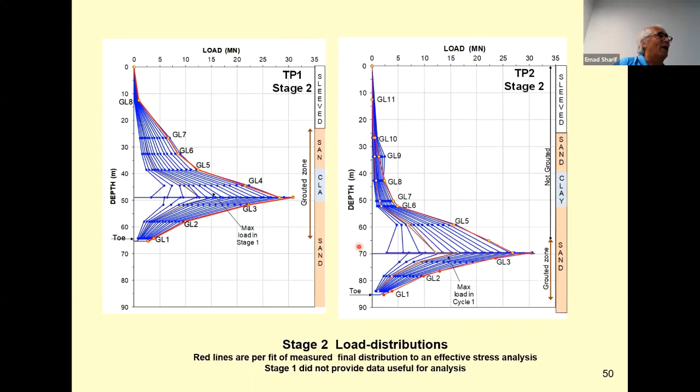And this is also the load distribution we got for the short pile, 65 meter, and for the long pile, showing the location of the O-cell. From that, we can also get the head down, or do the simulation.

If we do the simulation, again from the data, we can simulate the O-cell curves, and we can make our judgment about the accuracy of our simulation based on this. And then from that, we can get the head down curves.